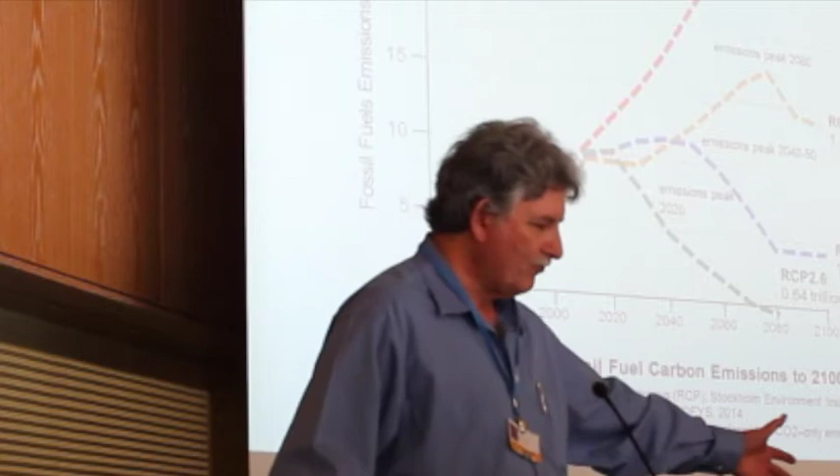So Ecofys and a group, Climate Analytics, gave a press conference just a few days ago. And the IPCC ran these, aggregated all the runs into 4 scenarios, but they left out in the report the 5th scenario, and this was presented in a press conference a few days ago. The 5th scenario, we call it the better than 85% chance of staying under 2 degrees centigrade. So a high probability of staying under 2 degrees centigrade.

The 2.6 scenario, which is the only other scenario that gives you a chance to stay under 2 degrees centigrade, is only a 66% chance. So what the scientists said is a 33% chance of going over. We're going to do all this work and we still have a 33% chance of going over. We really need to go to this 85% chance.

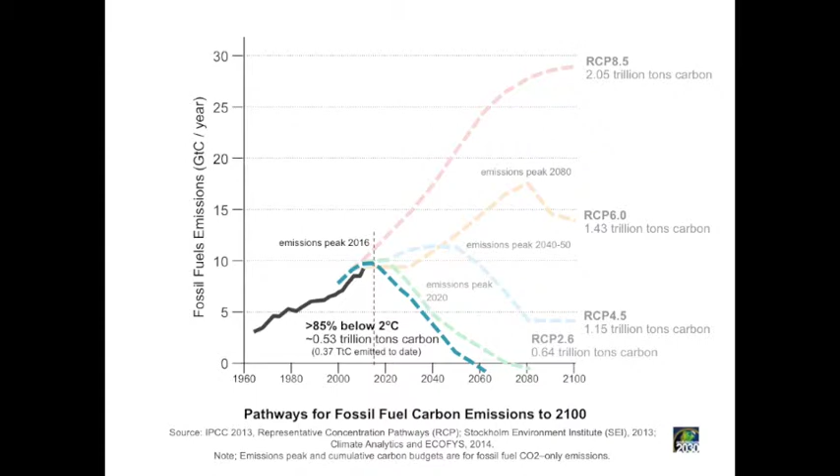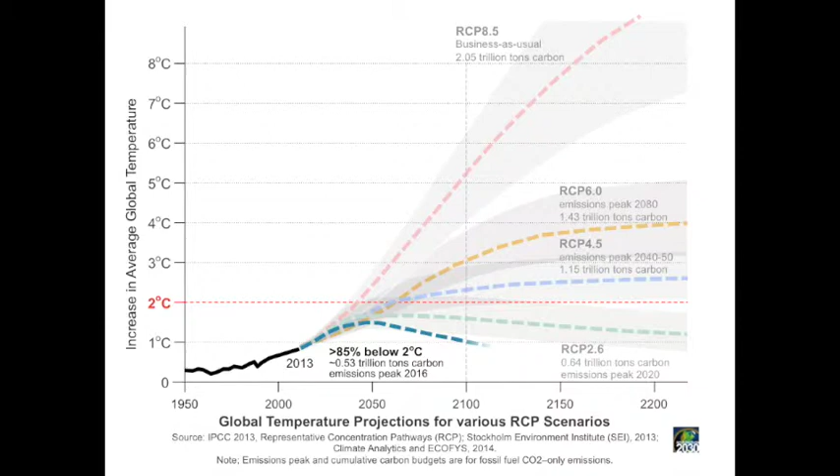And that's peaking emissions right after the summit in Paris, and then phasing out all CO2 emissions in the built environment, in the power sector and the industrial sector, by about 2050. So that's how this target of 2050 came along. Those are the 4 other scenarios, and the 2.6 gives you still a 33% chance of going over 2 degrees centigrade. And this is the scenario we all really need to follow, which is the better than 85% chance. So a really high probability of staying under 2 degrees centigrade.

So we have an opportunity, a huge opportunity that presents itself today. And that is that the urban environment is responsible for 75% of all greenhouse gas emissions. So if we get a handle on the urban built environment, we have a chance of meeting those targets.

And the good news is that by 2030, 80 billion square meters will be built new and torn down and rebuilt in urban environments worldwide, globally. So this is just urban environments. To give you an idea of what that is, that's an area equal to 60% of the entire built environment in the world. That's what 80 billion square meters is. It's a huge amount of building that's going to go on over this period of time.

So it's an opportunity, or if we don't do it right, it will lock us into an emissions pattern for the next 80 to 100 years. Buildings have a lifespan of 80 years on average, and infrastructure 120 years. So if we don't get it right, then there'll be no way to meet even the 2.6 scenario.

So where's all the building going to take place? In Western Europe, 4% of that over 80 billion square meters. Other developed countries, another 4%. Middle East and Africa, 9%. Latin America, 9%. India will be 9% all by itself. Other emerging economies, mostly in Southeast Asia, will be 12%.

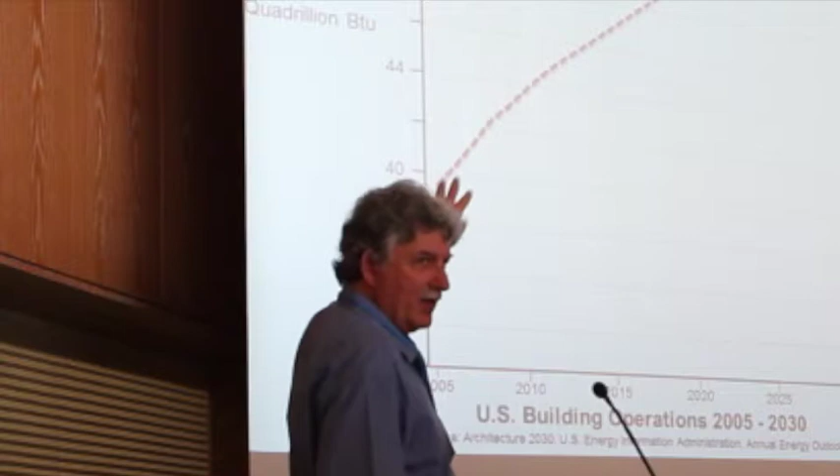We were at 40 quads of energy. You only have to know that that's energy consumption in 2005. That's how much the building sector in the U.S. used in 2005, 40 quads of energy. And the projection in 2005 from our Energy Information Administration was that by 2030 we would need over 57, 58 quads of energy. So the line was steep on how much energy we would need.

Well, all of a sudden we flattened out to 2007, and then they projected again how much we would need, and it went up, but it was down somewhat. So our building sector got more efficient in 2007. Then we had the recession in 2008, and we had a drop in energy consumption, and then we were projected to go up, but not as steeply. So half of that reduction is due to the recession, not as much building, and the other half is due to efficiency gains. Now the recession is built into the EIA models.

And all of a sudden something happened. We went flat, and then the projections came way down. These are all due to efficiency gains in the building sector. We're designing better buildings, we're building better buildings, the building codes are kicking in. In 2013, we actually went down. Even though we added 20 billion square feet to our building sector, our emissions on the whole building sector were going down. And then the projections were somewhat flat.

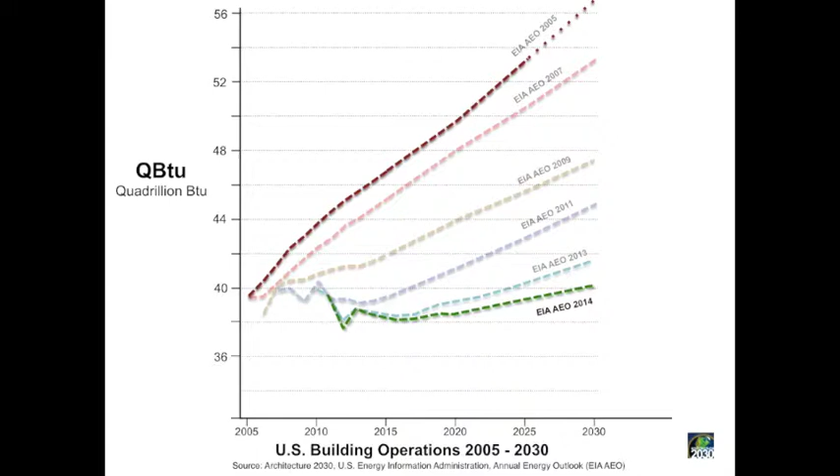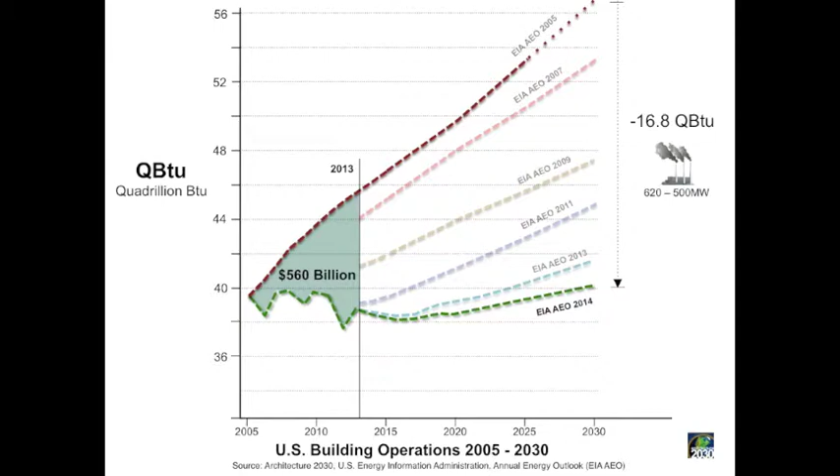So we're down 16.8 quads, the equivalent of 620 huge 500-megawatt power plants. We've saved the American consumer to date about $560 billion of what they were projected to spend on energy, and now they have money in their pockets to send their kids to school, buy food, housing. And we're expected to save the U.S. consumer $4.61 trillion from now until 2030 in terms of what they would have spent.

And they projected that if we just include the best available demand technologies in our buildings, we would then reduce consumption even further. This is what we have off the shelf in the US, and we'd save another almost $2 trillion in energy costs for consumers. Again, that's money that goes back into the economy.

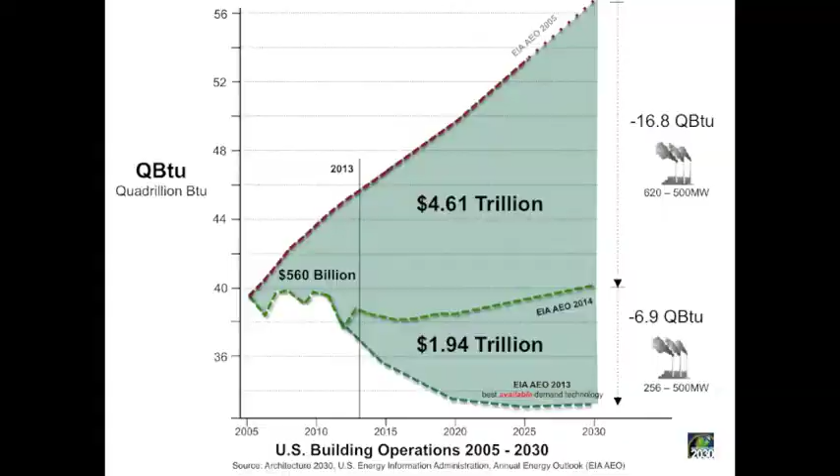So how did all that happen? It didn't just happen by osmosis, because we said, oh, let's get to zero, or let's move in that direction. But getting to zero is a two-step process. Step one is information. Step two is technology. Information gets us 70 to 80% of the reduction in buildings, and that's through design.

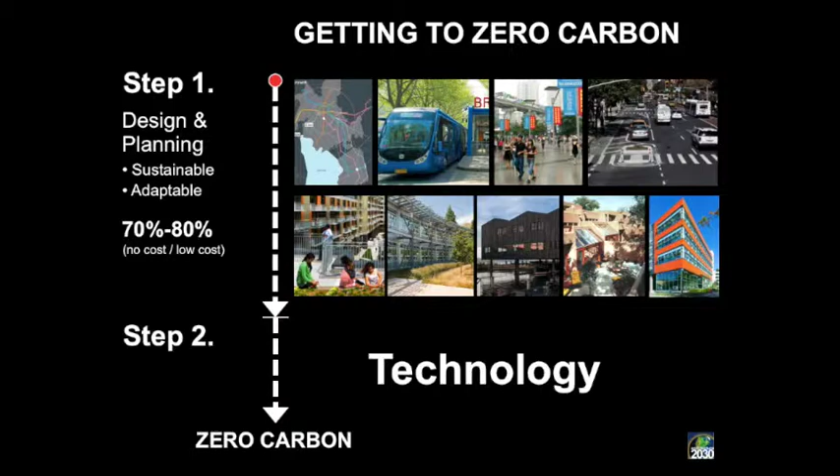That's everything from how you lay out buildings in cities, transportation corridors, walkable communities, all the way down to buildings and building elements, how we design them. You can design out 70 to 80% of the energy consumption of what a typical building uses in a new building or in a major renovation at no cost, low cost. In many cases, it's no cost.

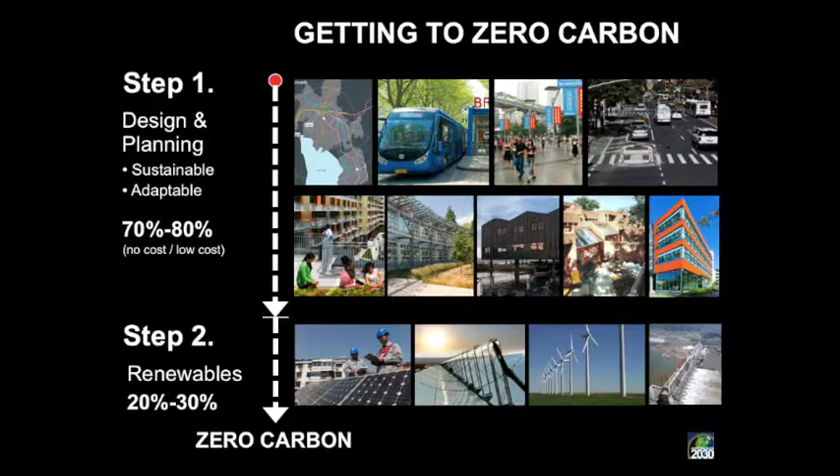And then, obviously, you're going to need some energy to run the buildings, and that's anything from site-scale solar to utility-scale renewables and other non-CO2 emitting energy. So, when we issued the targets in 2006, what happened?

Since then, 73% of the top 30 AE firms, which are multinational firms which practice all over the world, have adopted the targets and are beginning to implement them in the United States. And that's Arup, HOK, ZGF, the DLR Group, Gensler. These are the largest firms in the world that do work all over, but they're implementing those targets right now in the United States.

And 52% of all architecture firms in the United States have adopted the targets and are beginning to implement them. Getting to zero. Every major professional organization in North America has adopted the targets. The U.S. Conference of Mayors, National Association of Counties, the governors have adopted the targets. The federal government has put the targets into law for all new federal buildings.

All new federal buildings and major renovations must phase out carbon in their new building designs by 2030, and the president has just reconfirmed that and moved the date up to 2020. Issued an executive order, and we have many other states and cities around the U.S. that are adopting the targets to get to carbon neutral in new buildings and renovations by 2030.

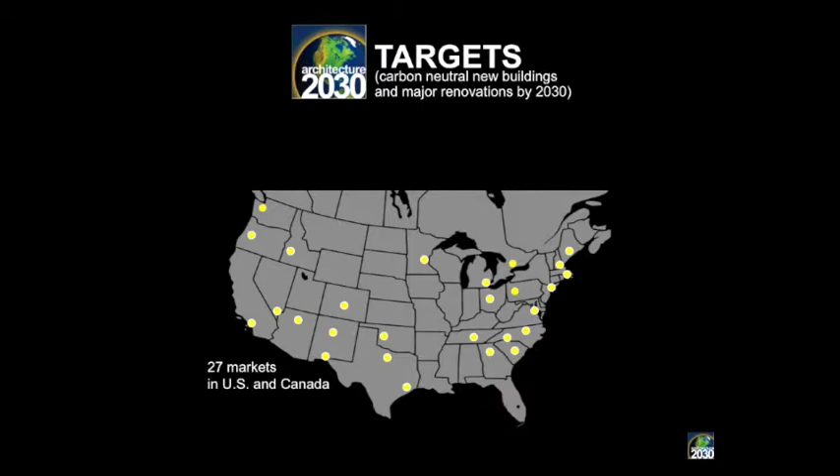And we're training our architects all across North America. In 27 markets, we have a professional education series that runs every year. We've been running it now for 5 years, and we've trained literally thousands of architects to meet the 2030 targets. We're just setting up an Urbanism Plus 2030 for the planners so that they can plan low-carbon cities and developments.

But we have an information gap. What's happening in one place is not happening everywhere, and a lot of this is news to people. So we need to bridge the gap globally and get the information out on how to design carbon neutral buildings. So at Architecture 2030, we just put online recently what we call the 2030 palette, and it's all the elements, action items that you need, from large planning scale issues to buildings and building elements, all tied together because it's all part of the built environment and it's all online.

And we just applied for a grant to actually do a China palette. We haven't started it yet, but we want to talk to Mr. Gao and others in China on collaborating on that. And so, to finish up, these are some of the elements that you'll see in the palette. It is a visual language, because that is the only language that is universal. If you want to bridge the gap, it has to be visual. It can't be in one language and then the other language.

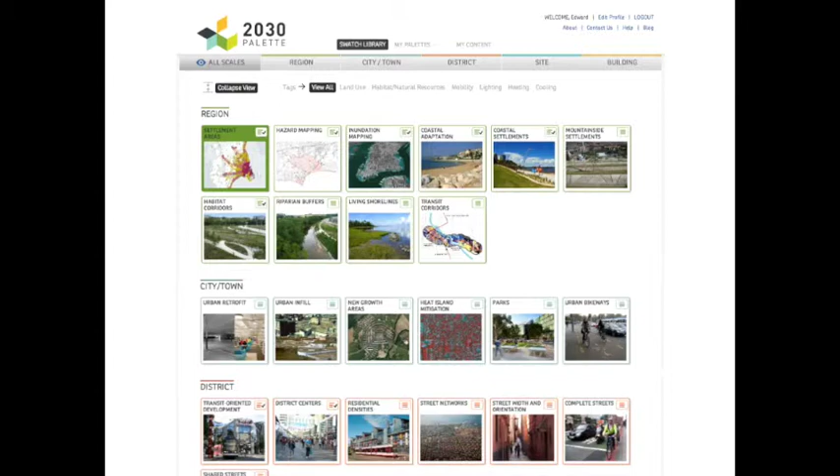So it's everything from living shorelines, how do you map for sea level rise, urban infill, heat island mitigation, down to transit-oriented developments, guidelines for transit developments. Actually, China's doing quite a bit of work on that. All the way down to the building scale, building elements, passive heating and cooling systems, everything that doesn't use energy. The 70 to 80% reduction is right here.

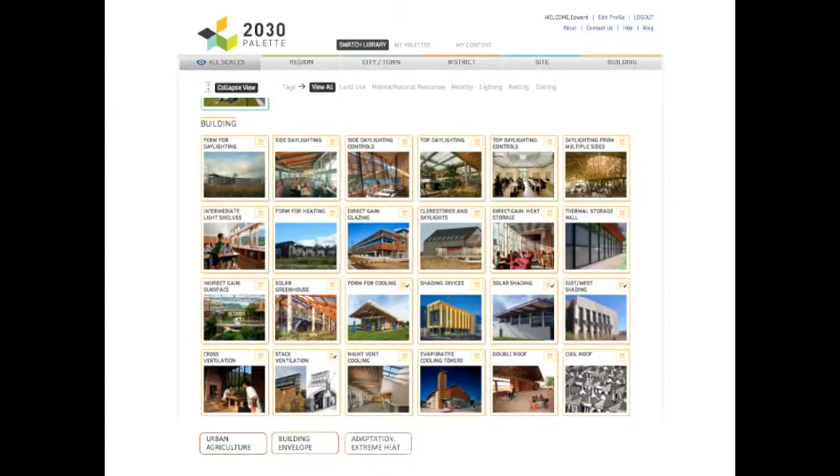And we're adding new ones as we go along. So we just issued the framework. And so to finish up with the roadmap, how do we get in Paris, how do we get to zero carbon in the building sector? So if we talk about just the building sector, how do we get to zero?

We've created the roadmap called Roadmap 2050, and we've set what need to be flexible country targets and then action items to meet those targets. And the action items would be obviously new buildings and existing buildings. So let's just show the country targets first.

If in 2015 some kind of agreement is signed for the building sector, and that's the CO2 level by country for the building sector, what we say is we go out to 2050 and 2055, that by 2020, you either peak in the building sector, and you're at zero emissions above 2015, or you're down 15%. So that's the range you would need to be in. So we expect the developed countries to be at minus 15%, and the developing countries to just be peaking at about that time. So there's some equity built into this.

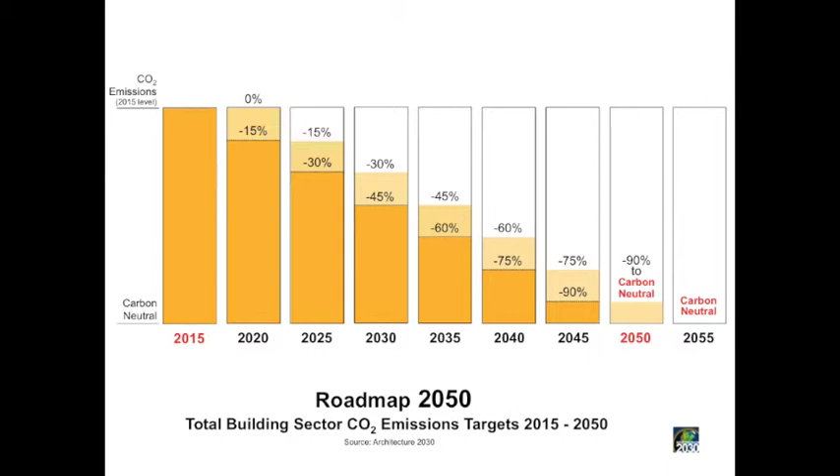And then in 2025, the developed countries down to roughly 30%, 25%. The developing countries now start to reduce and begin to implement the design strategies, the no-cost strategies. And then that moves out as a reduction, again, within a range to 2050, where we expect the developed countries to be carbon neutral in their building sector. This is the entire building sector. And the developing countries getting there, and then by 2055, everyone is carbon neutral.

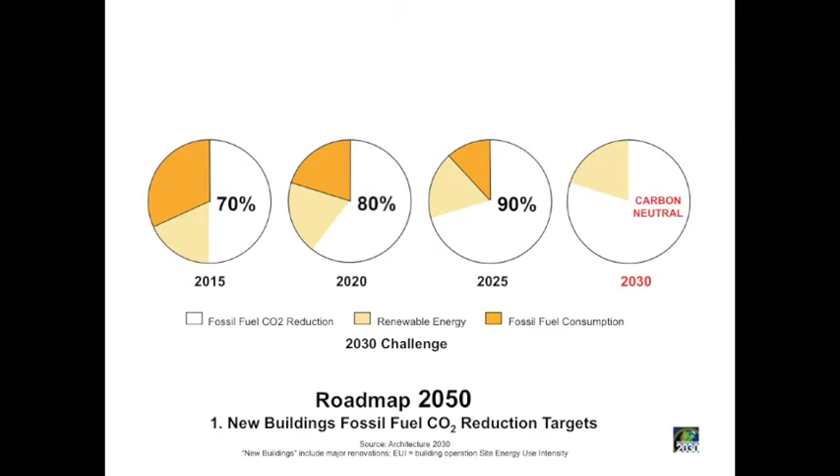So how do we do that? What we say is new buildings. If you're going to build a new building, your budget is 30% of what an existing average building is. And you can get down at no cost to that level, and then that increases to carbon neutral by 2030 for new building design. New buildings and major renovations where you practically gut the whole building out and rebuild it new.

And for existing buildings, what we say is that developed countries should renovate 2 to 3% of their building stock each year to a 50% reduction, roughly. So we start getting at the building stock, and we do that annually, and then developing countries, much less, and some of the financing needs to go from here to here to help them get to this stage. 1.5 to 2% of their building stock should be renovated each year to about a 50% reduction, so these are programs that are put in place.

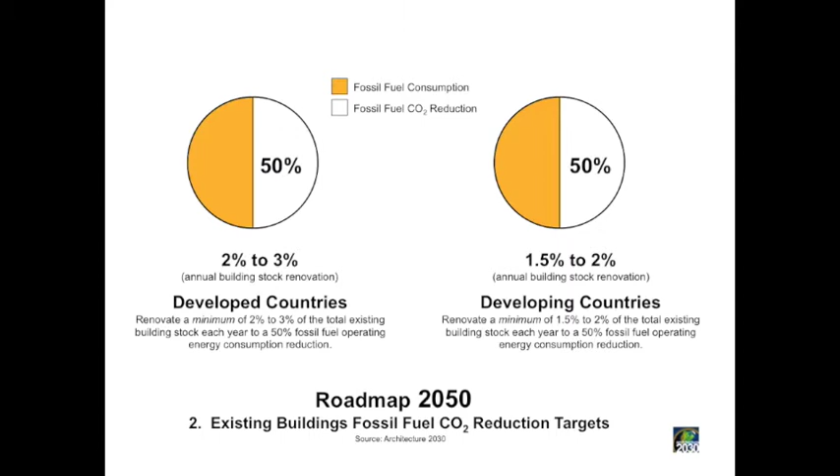If we do that, this is where the building sector will be right at the signing of the accord. You can see it's going up. About 70% of what the building sector uses is fossil fuel emitting energy, and the rest is obviously cleaner energy. If we implement those two targets, new buildings and then the renovation targets, what happens is the building sector starts on a track down, this is the global building sector, roughly 1.25% a year.

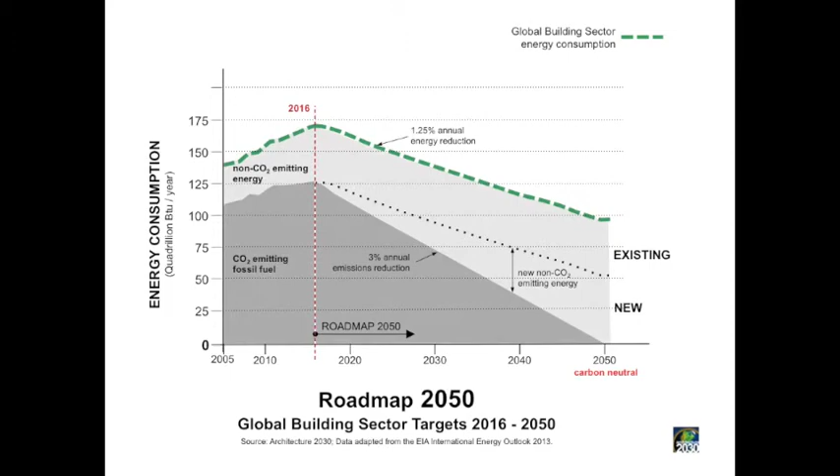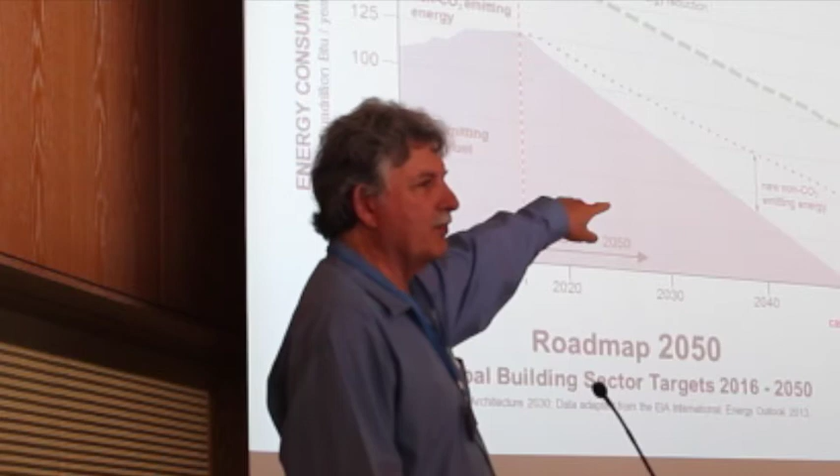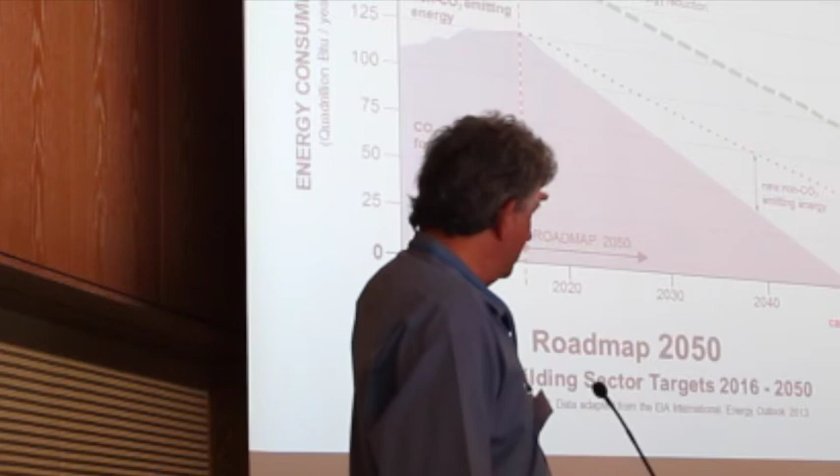And then you see the rest has to be made up by non-CO2 emitting energy. So what's existing is roughly 30%, and then you need a little over double that. If you put the efficiency gains in, and you do the renovations to the 50%, then you can make it up with non-CO2 sources. Otherwise, it's impossible. So we need to roughly double, a little more than double the amount of renewables that we have in the world today, and non-CO2 that includes other energy sources. That would get us on a 3% track.